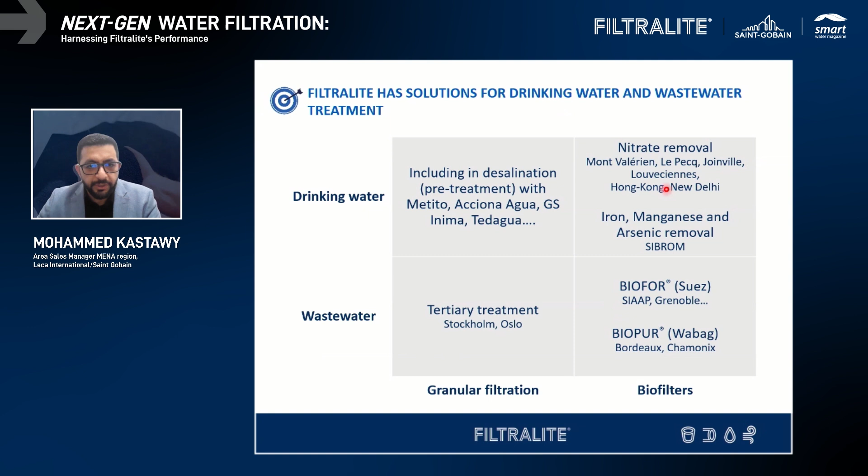So what is the traditional filtration media that we can see, and what are the challenges that, from our point of view, our customers are facing? This is a simple drawing.

It's showing that the filter media can come as one layer, most likely sand, or two layers where the customer is using sand and anthracite. Mainly they are using sand at the bottom and anthracite as a top layer.

Here, our first point, what we see as a challenge, is the retention of the sand. As we know, sand is mainly a solid part, so its retention capacity is very low comparing with Filtralite. When it comes to the filtration rate, it's mainly between 4 meters per hour and 12 meters per hour.

So in case you want to increase production, you have a limit of up to 12 meters per hour. Also, for both solutions, one of the challenges we see is the high, or big, head losses that you see during operation caused by this medium. At the same time, there's expensive OpEx when it comes to operation, and also the intermixing layer.

As we know, the bulk density of sand is around 1,600 kilograms per cubic meter, and for anthracite it's mainly from 800 to 900 kilograms per cubic meter. So just imagine you have these two layers, and once you stop the backwash, you have this intermixing layer between anthracite and sand.

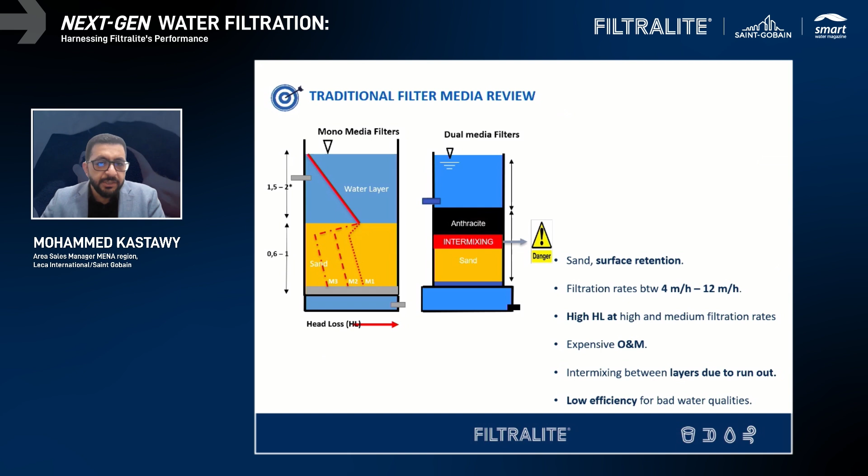So what can you expect when you want to change? First, let's talk about the optimization and improvements you can expect. First point: if you have sand, anthracite, pumice, or any other kind of media working in a sand filter...

Then you have to know that it's very easy and quick to remove it and use Filtralite. You don't need to change anything in your plant. We just need to remove the current media and install Filtralite.

When it comes to filtration rate, as we can see here, it's up to 20 meters per hour. That means you can increase the production of your existing plant. At the same time, when you are using other media, you can expect frequent clogging, and this issue can be solved by Filtralite.

We will explain in our presentation how we can solve that. Of course, doing a lot of backwash means using a lot of frequent water in washing, and then you end up losing a lot of water. So this part you can also save.

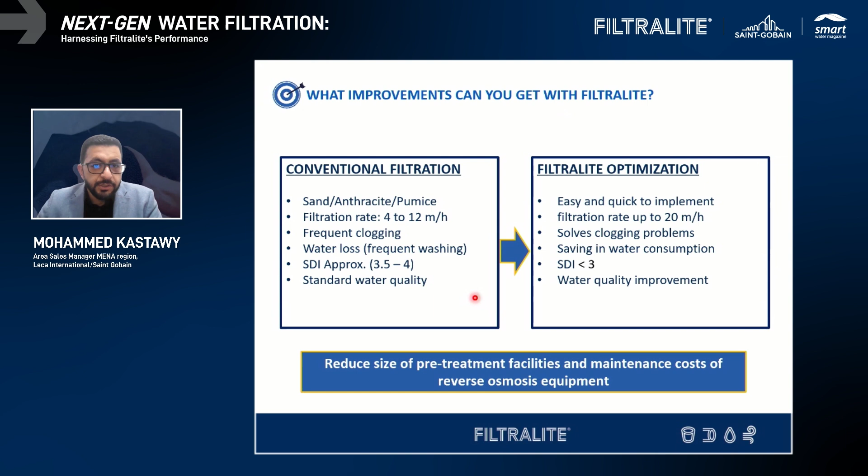When it comes to the SDI in desalination, you can also expect a better, or lower, number of SDI, and this of course will cause better water quality. So this is, in total, what you can expect. But let us just jump to what Filtralite is and how we are manufacturing this media.

Basically, as we can see in this picture, Filtralite is a clay. So the main raw material for Filtralite is clay. We choose this based on the purity, particle size, distribution, and other qualities to assure product quality.

So this selected clay is crushed and stored. We dig in the ground, get this clay, crush it and store it into fine particles to make lightweight aggregates. Then, once the clay is ready, it's mixed with water and other ingredients to make sure the end product is better. And then it comes to the heat treatment.

We have this rotary kiln or furnace where we can heat the media inside the Filtralite up to 1,200 Celsius. All the organic material inside the clay turns into gas and evaporates, and then the clay expands. So as you can see here, 1 cubic meter goes inside the furnace, and it ends up with 3 cubic meters.

So you get an expanded clay, and at the same time a lighter medium. Then it goes to the cooling part, where you cool this media to ambient temperature, and after that you can crush it or screen it to obtain particle size distribution. So at the end, we get different particle sizes, grain sizes, and different densities.

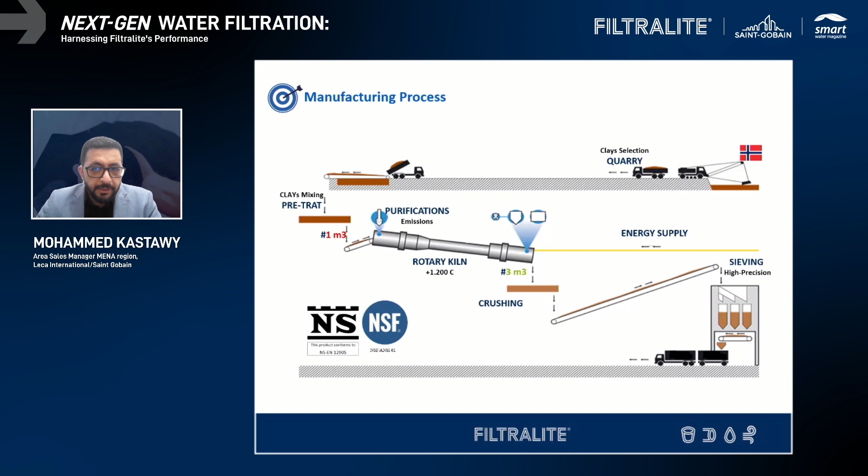This picture explains how Filtralite is a unique media compared with other media, showing the benefits of using Filtralite. As you can see, Filtralite has a higher porosity compared with sand, which gives you more storage capacity if you want to run the filter for a longer time before you stop and do the backwash. The reason is that you're using the depth of Filtralite in a much better way than sand, because sand and anthracite get clogged in the top layer.

As we saw in the previous slides, you have the anthracite on top, let's say, and the sand in the bottom, and then you get clogging from the top layer. But with Filtralite, you can avoid that because you're using the whole depth of the media, due to this porosity, as you can see in the picture.

At the end, you'll have less backwash, meaning less energy consumption. It's especially an ideal solution for projects or sites where the customer wants to produce more water. By using Filtralite, they can increase the production of the plant without increasing the number of filters. We're also going to see some live cases for this.

Also, as we know, this high porosity is a good feature that will allow you to remove more suspended solids, and of course this will affect your backwash, as we said.

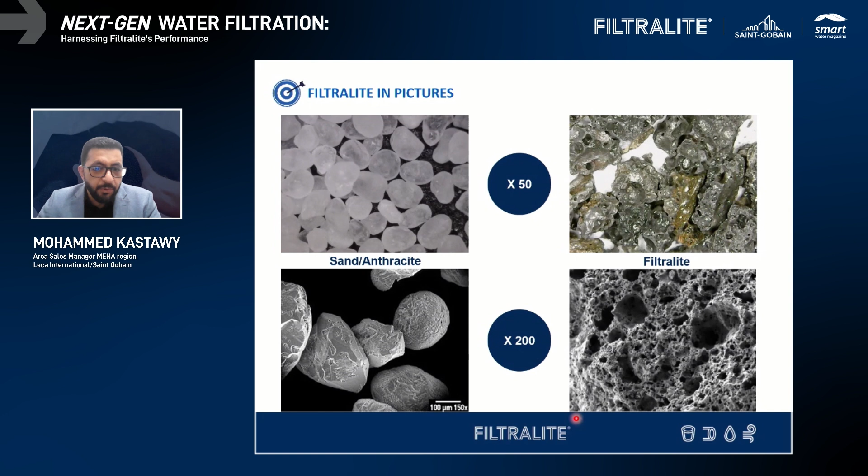In terms of OPEX and CAPEX, I'm putting these in two terms because we can target new plants as well as current ones. So if you're an operator and you want to save OPEX in your current plant, which is already in operation, by using Filtralite you can expect 2 to 4 times less backwash. So you'll get a higher filtration rate, meaning more water in the same period.

In case of the RO plant, you'll have more stable biological water coming from the filter, meaning less biofouling to the membrane. Then you can increase the lifetime of your RO membrane, and of course you'll have less cleaning and replacement of the cartridge. At the same time, you'll be able to allow more suspended solids in the feed water, giving you a longer time before you need to stop and do the backwash.

But let's say you're a new customer building a new plant and you're caring about CAPEX. Then again, Filtralite is an ideal solution because, as we said, you can expect to increase the filtration rate. So instead of using 10 filters, you can use 6 or 7 filters, meaning less footprint, saving in backwash, concrete, and steel.

Also, because Filtralite is a lighter media compared with other media, you're able to use a smaller backwash, which will again impact your energy consumption. So this covers OPEX and CAPEX.

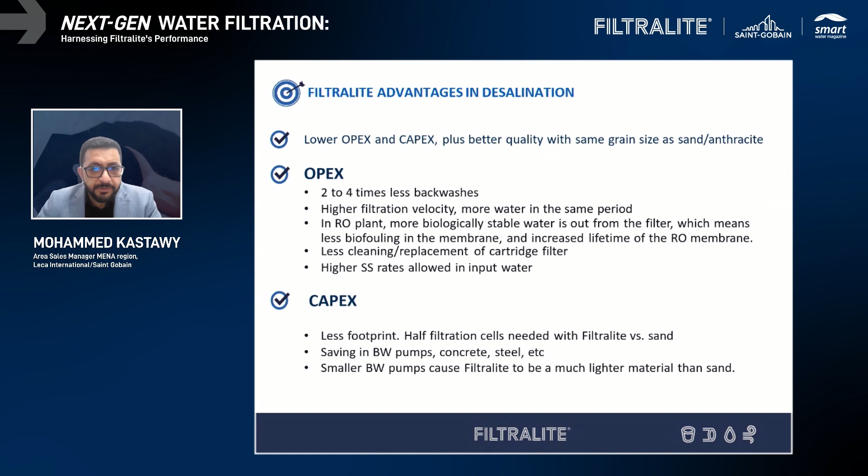So what are the solutions and how can we give you Filtralite as a solution? We can provide you with 2 options.

The first one is to have one layer of Filtralite, as you can see on the left side of this picture, and this is mainly recommended for a depth of up to 1 or 1.2 meters. But if you look to the right side and you have a depth of more than 1.2 meters, let's say a 2 meter media bed, in that case we can provide you with 2 layers.

As you can see at the bottom, you will have a layer with a smaller grain size but higher density. In the top layer, you will have exactly the opposite: lighter density but with a bigger grain size. So you have the coarse layer and the fine layer.

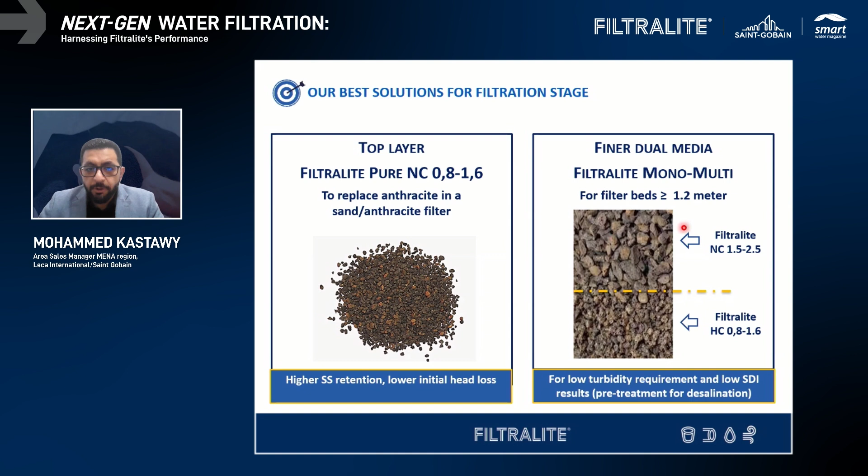In that case, you are using 2 different grain sizes and 2 different densities, and this is how you overcome the intermixing layer issue we saw in the previous slide. So when you stop the backwash, the bottom layer with higher density settles down first, and then the lower density layer with a bigger grain size settles on top. This is how you keep the same performance of your filter.

So let's see now - I get this question many times: I want to see how Filtralite performs against other media. It's an important question, and the customer has the right to see, when making this investment to switch to Filtralite, what kind of performance he can expect.

So what I'm going to show you today is 4 different cases, and all of them were done by a third party, not by us - either an engineering institute or one of our OEM customers. The first one we have is from Engopras.

This is a very important case for customers looking at turbidity or suspended solids. Here we have 2 ideal comparisons: one with Filtralite with a grain size of 0.8 up to 1.6, combined with sand of 0.4, 0.8.

To have a fair comparison, we did the same exact setup. We chose the same particle size, but instead of Filtralite we chose anthracite with the same grain size 0.8 to 1.6, again combined with sand 0.4 and 0.8.

We did this experiment with different strategies. The first one used an input suspended solid of 80 milligrams per liter, and we tested different filtration rates: 8 meters per hour, 15 meters per hour, and 20 meters per hour.

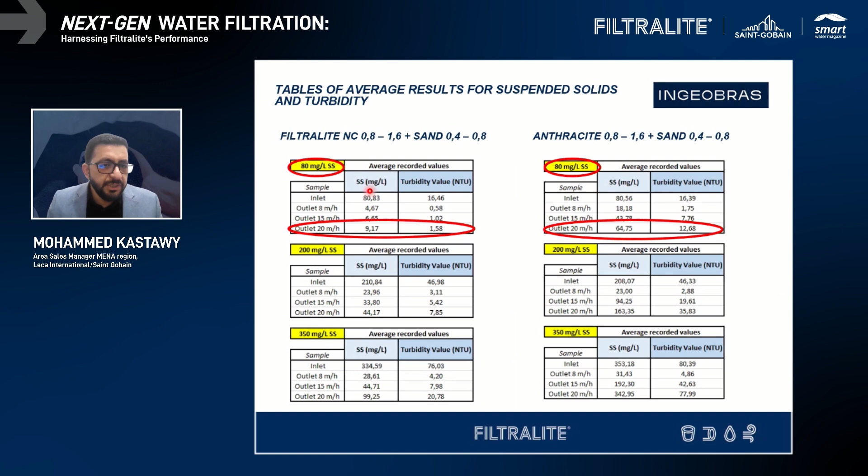What parameters are we measuring? First is turbidity in NTU, and suspended solids - practically, how much this media can reduce from the 80 milligram per liter input of suspended solids.

In the first case, with anthracite combined with sand, the input was 80 milligrams per liter suspended solid, tested at 8, 15, and 20 meters per hour - I'm just highlighting this one, but the difference holds for all of them. As you can see, from 80 milligrams per liter, it dropped to 64.

So from 80 to 64, with a turbidity of 12.7. What Filtralite achieved here is a drop from 80 to about 9.1 or 9.2, with a turbidity of 1.58. Can you see the difference between both of them? Turbidity is 12.7 for anthracite versus about 1.6 for Filtralite, while the suspended solid outcome from the filter is 64.75 with anthracite, compared to 9.17 with Filtralite.

And this gap gets even bigger when we increase the suspended solid input, or test at higher suspended solid levels. For example, from 200, it dropped to 163 with a turbidity of 35 using anthracite, while with Filtralite it dropped from 200 to 44 - so from 163 down to 44.

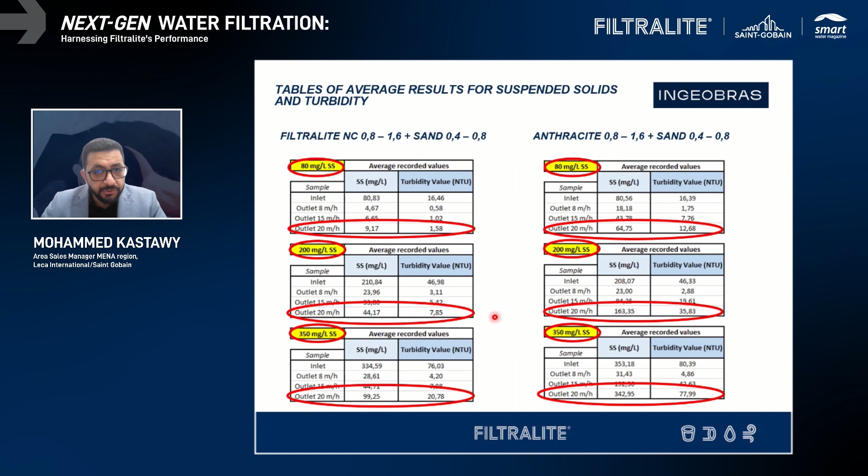Again, we're getting a better turbidity, dropping from 35 to 7.8. Same result for the 350 milligram case. In this one, the gap is even bigger: it dropped from 350 to 343 with a turbidity of 78, while in the other case it dropped from 350 to 99 with a turbidity of 20. So in all cases, we're getting better turbidity, better water quality, while at the same time storing more suspended solids in the filter.

Case number 2 was done by Suez, one of the biggest OEMs globally, and we all know Suez very well. They ran an experiment with 5 columns, checking turbidity and UFRV. Let's start with turbidity.

The first column used sand with 0.75, the second column sand with 0.95, the third was anthracite with sand, then one layer of Filtralite dark green, and finally two layers called mono-multi, shown in light green. Of course, the same parameters were fixed for all 5 columns.

The turbidity gives the best numbers with the green one, which is Filtralite, and it gets even better when using two layers of Filtralite, dropping to less than 0.1 turbidity.

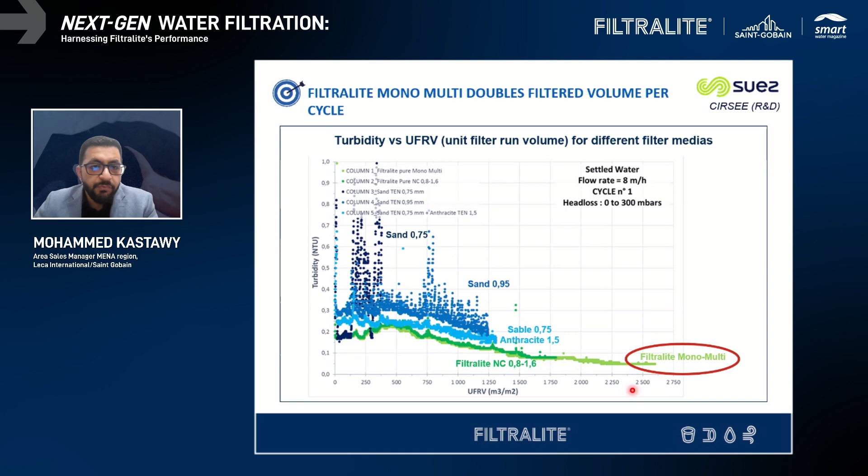At the same time, the UFRV is very important — essentially how many cubic meters pass per square meter. With the best of the first three columns, sand and anthracite, they reached 1,250 cubic meters per square meter before needing backwash. With one layer of Filtralite, it exceeded 1,750 before stopping, and with two layers of Filtralite, mono-multi, it exceeded 2,500. So with the same filter and same water quality going in, instead of stopping at 1,250 cubic meters per square meter, you get a longer filter run — either 1,750 with one layer of Filtralite, or double that, 2,500, with two layers. This is how Filtralite performs in terms of turbidity and UFRV.

Also here we have two layers, but at different filtration rates — one at 8 meters per hour in dark green, and the dashed line at 15 meters per hour. As we can see, we get the same production with a higher filtration rate, meaning you're doubling your plant's production.

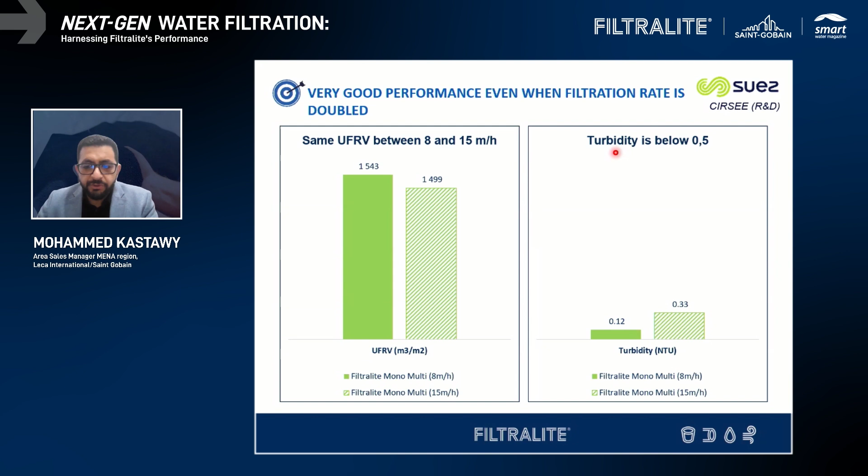Suez wanted to make sure the turbidity stayed good, so they set a benchmark of below 0.5. Even when we increased the filtration rate from 8 to 15 meters per hour, we still scored 0.3, below the 0.5 benchmark. So we're getting good quality water while doubling the filtration rate or production.

Case number 3 was done by CPERI, in a desalination plant in Spain, looking at how Filtralite performs for TOC removal, total organic carbon. This is very important, especially in desalination processes using reverse osmosis or other membrane technologies. TOC in the feed water can cause fouling and scaling of the RO membrane, decreasing efficiency and increasing operation costs — so removing or reducing TOC is crucial.

They tested TOC removal at an average filtration rate of 5 meters per hour: using sand and anthracite, they removed only 37%, while with Filtralite they removed 50%. When the filtration rate was increased from 5 to 15 meters per hour, sand and anthracite removed only 26%, but Filtralite still achieved 40%.

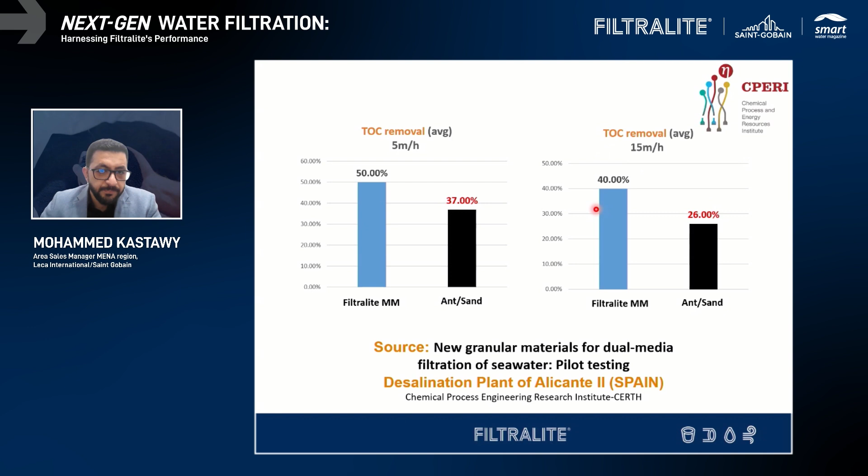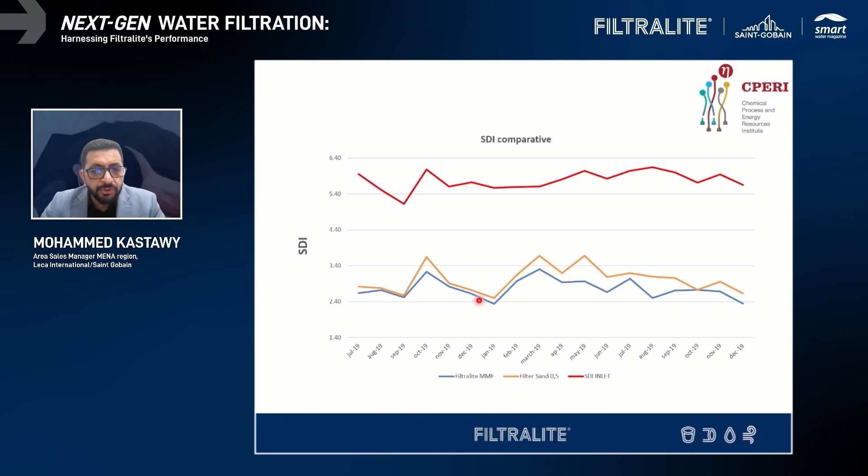So this is how much you can increase the amount of TOC removal in your water. In terms of SDI, the one you can see here in the red line is for the SDI input. So during one complete year, as you can see, Filtralite with the blue color is always scoring better results in terms of SDI, with different input values, Filtralite is scoring much better results comparing with sand.

For the fourth case, we have done this again by Suez, and they did something called a friability test. One of the very important points about Filtralite is how many years you can use it. In our operation manual, we say that if you use Filtralite with our backwash protocol in the right terms, then Filtralite can last for 25 years. I was surprised to find we have some plants still operating from 30 years back till today.

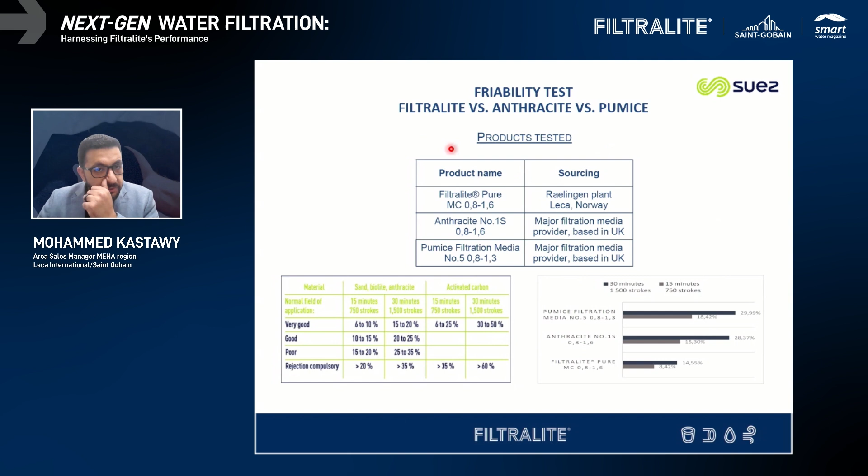So this was our first case showing the performance of Filtralite against other media.

Now let's talk about the references. As Alexander mentioned in the beginning, I'm here based in the Middle East, and let me say that very clear: we have references globally, around 750 plants, either desalination, drinking water, or wastewater, running with Filtralite for many, many years. So it's not a new product, it's not a new company, but we now have our first steps in the Middle East.

But luckily we now have some references in the Middle East too, so I will explain these references globally. Of course, these references, either in the Middle East or globally, are available as per your request. Whenever you request, you can send us directly and we will send you the full information about these plants, how many years it's been running, which exact model we are using, who our customer is, and what type of plant it is. So let's go to the first case study, starting with Thames Water.

And in this one in London, the customer had a major problem in water quality, especially from July to November, due to the high number of algae in the water. Plus, they also wanted to increase the production, or capacity, of this plant. That was done in 2001, when the population in London increased, and Thames Water was being asked to increase the production of this plant.

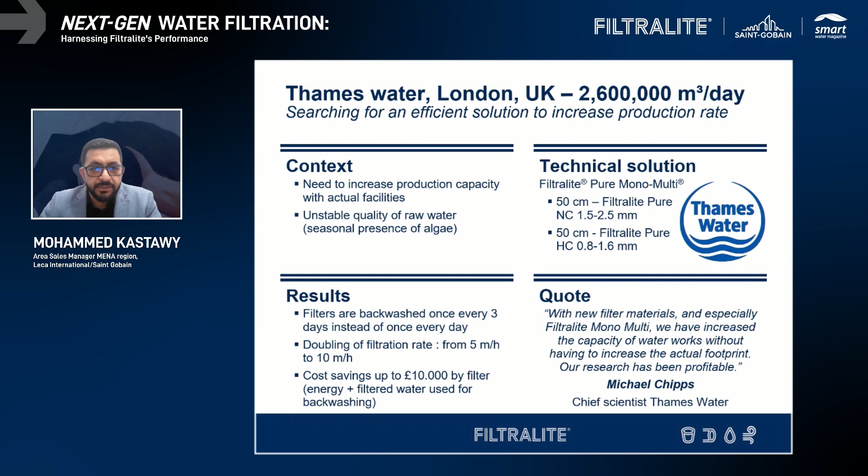Now to the next one, which is Veas, and I'm very proud to talk about this one. I was there myself last December - this is the largest wastewater treatment plant in Norway, with a capacity of 100 million cubic meters per year. This plant was built in 1984. In 1994, after 10 years, they had a problem - this plant is built under the mountain, and they have very limited space to increase the number of filters. The population in Oslo increased, and they wanted to increase the capacity of this plant.

So in 1994, they decided to go with Filtralite. They were able to increase the filtration rate. We have a huge record in terms of long-term lifespan, because this plant has been running since 1994 till today - that's almost more than 30 years, and it's still running with the same media.

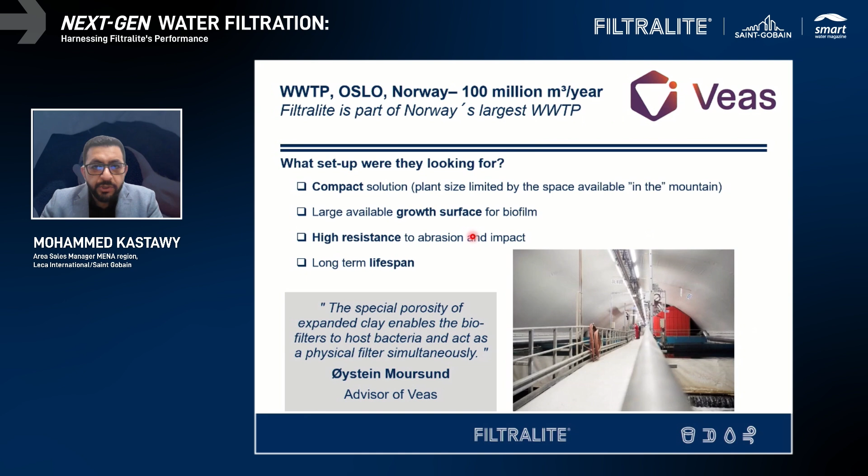The third one, we had a full scale test done by acuaMed, in Spain, in a desalination plant pre-treatment. They wanted to measure the consumption of backwash and the number of backwashes during the month. So let's take this as our benchmark for sand - it scored 100 as a consumption of backwash. Then with sand and anthracite you can reduce it from 100 to almost 75.

But with sand and Filtralite - and I'm highlighting this, sand and Filtralite, not only Filtralite - they were able to reduce from 100 to almost 30-35. That means around 65% of the consumption of backwash goes instead to your production in the plant. Just imagine that, with sand and Filtralite.

This is a very good point, and I want to echo it again: Filtralite can be used with sand, or it can be used alone - as I said in the beginning, either one layer with a depth like 1 meter, or two different layers with different densities or grain sizes if you have a bed around 2 meters or 1.5 meters. In terms of backwash, again, with sand alone it was 12 backwashes.

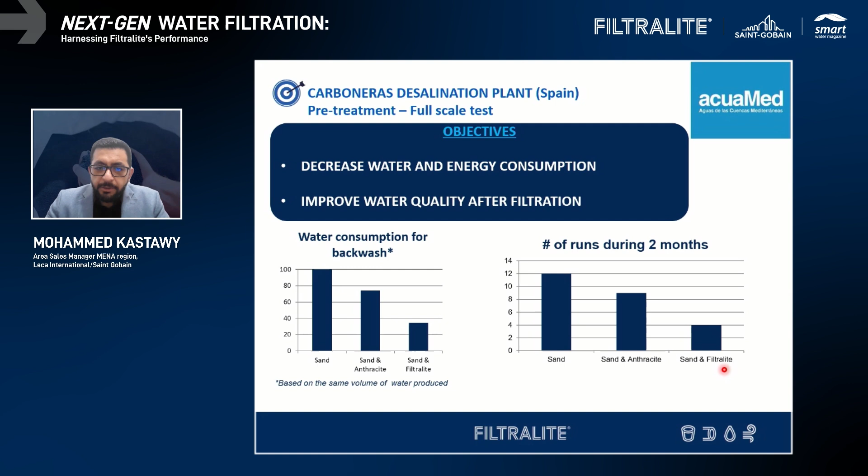With sand and anthracite, it was almost 9, while with sand and Filtralite, it's 4. Again, of course you can use this as a solution - sand with Filtralite - or even get the optimum result if you use only Filtralite, like we saw in the experiment done by Swiss, with the light green line and the dark green line.

The last one, this is a Beni Saf desalination plant, done in Algeria. It was in 2020. This one, the capacity was 200,000 cubic meter per day. They had 48 filters. The water losses in 4 months was around 673,000 cubic meter per day. And it was only allowed to get and feed water with a suspended solid up to 25 milligram.

Then they had to stop and do the backwash because it got clogged. So the first stage was to change in 2020, they changed 24 filters, and the water loss dropped by 45%. But on the other hand, the suspended solid limit increased from 25 milligram per liter to 40 milligram per liter.

And at this stage, the customer decided, I want to change the whole filters. So they changed it, and now the suspended solid allowed went from 25 milligram per liter up to 70 milligram per liter. And the water loss decreased by 85%. This plant now has a capacity of 300,000 cubic meter per day. It's been running for 4 years now, and it's in Algeria.

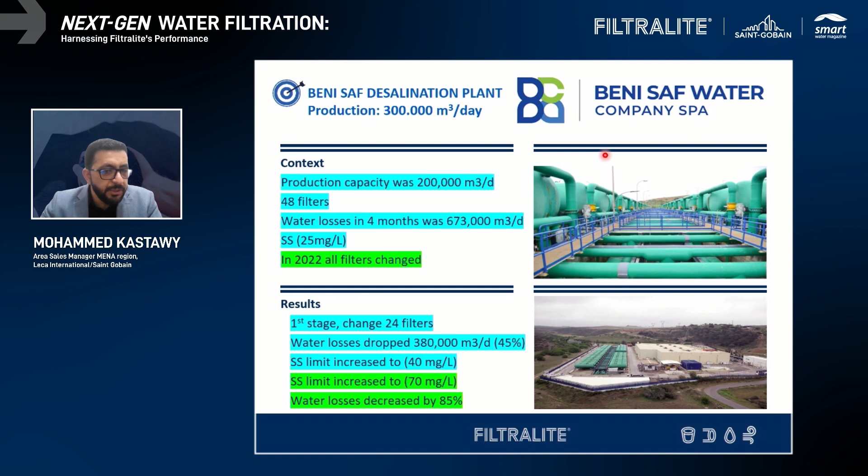I hope that I didn't go very, very quickly or very fast. Now I want to close with the conclusion to give our attendees time to ask some questions.

The conclusion: in many applications, it's been the best solution to use Filtralite. As I told you, it's now running for drinking water and desalination plants, more than 400 plants, and wastewater plants, more than 300 plants, some of them since 1994.

It's very direct and easy to replace, so you don't need to change anything in your plant. Just remove your current media, use Filtralite. Or if you are building a new plant, then you can save, as I told you, in terms of capex, you can save the number of filters.

It allows you to increase the filtration rate by 50%. Sometimes, as we saw in this case with Thames Water, it was double, and it can reach up to 20 meters per hour. It solves your issues when it comes to fast clogging or poor quality. It gives you more time to run the filter till you stop and do the backwash.

It solves your issue about the short lifespan, so you don't need to change it every 5 or 10 years. Especially for companies thinking of this project like a BOT or BOOT, they care about how much time they will need to change the media during 25 years, 30 years. You don't have to consider that or be concerned about this point.